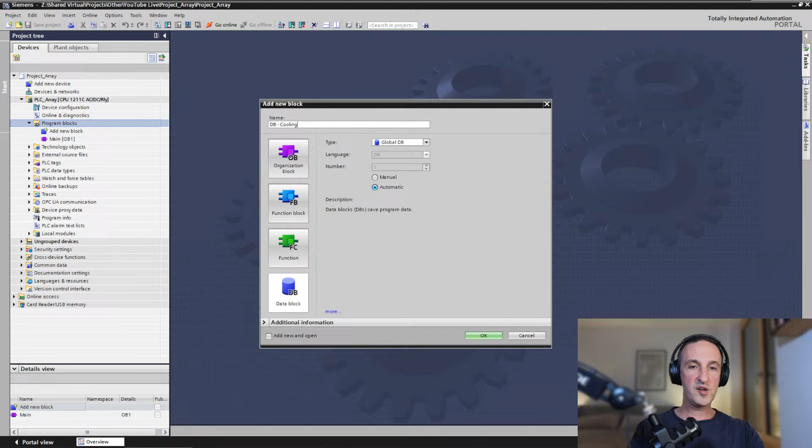The first place you can declare them is in a global data block. So for example, I add a data block, and because I'm going to use this later for examples with temperatures, let's call it DB cooling. Here under DB cooling, we can create a temperature log and declare it as an array. I will first show you how to type it in, so you can just press enter.

It auto-completes an array of reals, because temperature is a floating point most of the time, unless you want to keep it an integer and scale it afterwards. But let's keep this simple and say we have 100 values, from 0 to 99. So we have an array of 100 temperature values right here.

Another array could be, for example, status bits, cooling status. Let's say this is Boolean, so cooling status. Let's say you have 5 coolers, so you would have an array, and I can show you what can be done here as well. You don't need to start with 0, you can start with 1. An array 1 to 5 of Booleans. So this could be, for example, 5 cooling stations with a status for each cooling. Exactly.

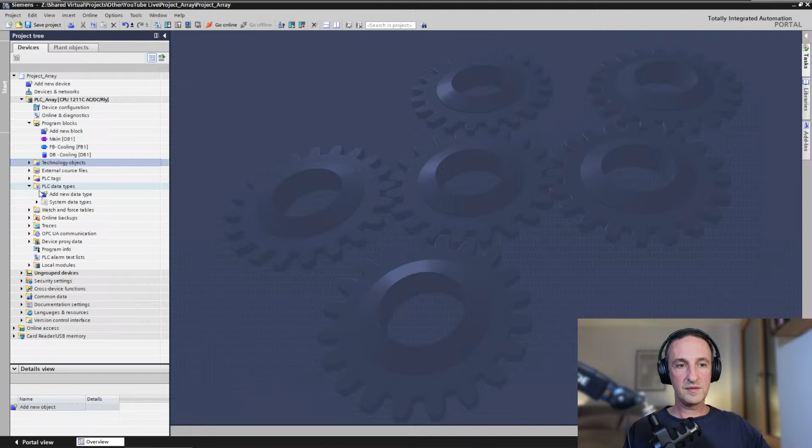But for all the other ones, for the temporary memory area, the static memory area, the in-out, the output, the input, you can create arrays as well. So that's actually instance data. So global data, instance data, and the last place where you can create arrays are in the data types. So in the PLC tags, for an input or an output, for example, you cannot create an array.

But for a data type, if you would create a new data type, for example, UDT cooling. UDT stands for user-defined data type. I think it comes from Simatic Manager. They used to call it UDT by default. And since I come from a Simatic Manager background, I kind of took over the naming from there.

So here you can as well create, for example, a temperature log. And you can assign array of real. All right. So those 3 places you can declare arrays in TIA Portal: global DBs, instance DBs, and PLC data types.

Yeah, this is a little bit more advanced, but I'm just going to show you, an array can have multiple dimensions. This is just a one-dimensional array, but you can as well, for example, create a 2-dimensional array. Let's say, for example, you have 5 coolers, again, like the last example, with 100 temperature values. So you like to log for each cooler.

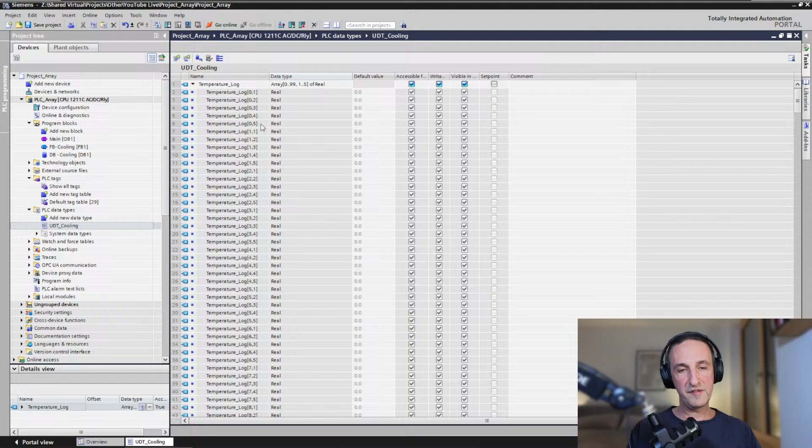Now you can see you have 2 dimensions, dimension 1 and dimension 2. So dimension 1 is the 0 to 99. Those are the temperature values, for example, and the 1 to 5 are the coolers you have. So now for each cooler, 1, 2, 3, 4, 5, you have 100 temperature values.

It probably makes more sense, I see that now, to do the coolers first. It would make for a better example, because the first dimension, you clearly can see that I don't use this a lot. So now it's more logical. So the first cooler will have 100 temperature values, the second cooler 100 values, etc.

But you know, this is more advanced arrays, and to be honest, I've never used this type of array in my career. I never had any use for it. The one-dimensional array, that's the one that I use the most. Let's see where we are here. Yeah. Okay, so those are the simple data type arrays.

Now I'll show you the more complex type of arrays that you can make. I'm not going to do it here. I'm going to do it in the DB. So these are just using single data types, the examples we've seen here. I'll just get rid of this one here. I'll now show you, for example, how you can make an array with a struct.

So let's call this one, for example, temperature log2. And we take, for example, an array 0 to 9. Let's say we have 10 values to keep it more simple, of struct.

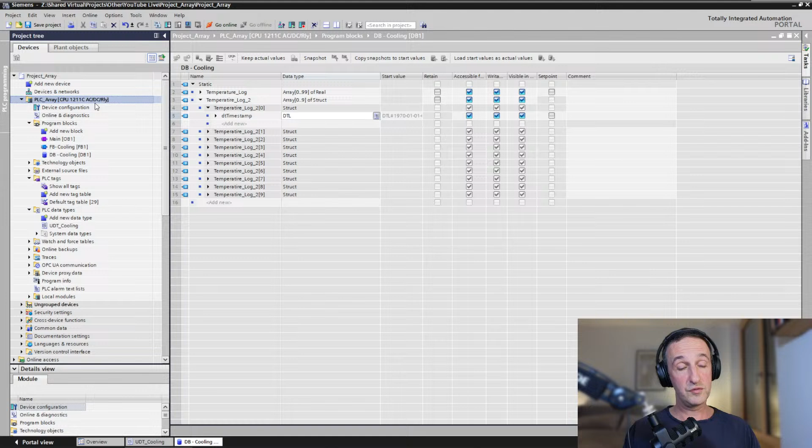Let's say we have a timestamp for our temperature log, which can be the long date and time format, which, by the way, you can use both in a 1200 and a 1500, S7. There are some other time formats which are only available for the 1500, S7-1500, but if you use a timestamp in your projects and you're working both with 1200 and 1500, depending on the size of the project, I would recommend you use the DTL, because as you can see, I have a 1200, it works here. And yeah, I've been using that quite a lot.

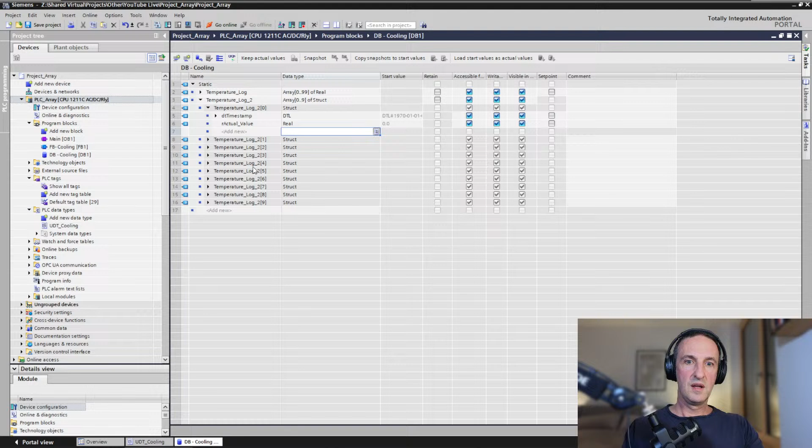So you have the year, the month, the day, etc., the hour. So that's one of the structures that we want to define. Then we have the actual value, the actual temperature. And I've miswritten here temperature. This will be a real. Then we, for example, can have the valve opening status. Let's say we have a control valve in a cooling unit, and we have a 0 to 100% valve opening percentage. Let's keep that real as well, and to make it more clear, 0 to 100%. This could be minus 40 to 60 degrees, for example, which is like a standard range for a cooling temperature.

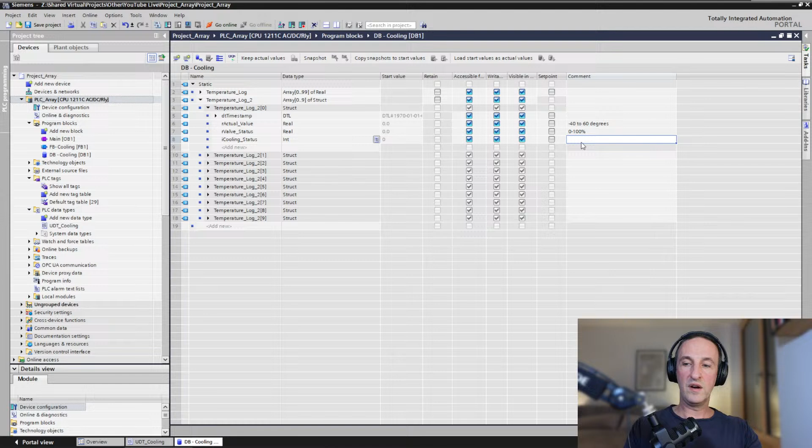And then, finally, we can have a cooling status as well, which might be the status if your cooling is running, is not running, or is faulted. So it can use an integer, for example, where 0 is off, 1 is running, and 2 is faulted. And this here is the date and time. So now we've created an array of a structure, and you can see every element of the array contains this structure. And this is one way of creating an array of a structure.

The other way, and that's the way that I normally do it, is by using a user-defined data type. So, for example, if we have a UDT called UDT temperature log, to keep the naming the same. And then what we can do is simply copy these ones here, Control C, and I'll paste them here. So now the only thing I've done is I've taken those values from the structure and I've added them to the user-defined data type.

So now instead of the struct, which is always created locally, and if you would use the struct somewhere else, you need to create that struct locally as well in the other function block. If you use a UDT, then you just need to add that UDT to whatever place in the software you're using it. So it's global, and there's only one place where you have to change it, which is in the UDT. So I would recommend that you always, as much as possible, work with UDTs, because it saves you lots of time. It makes your software more modular, easier to troubleshoot. It only has upsides, the way I see it.

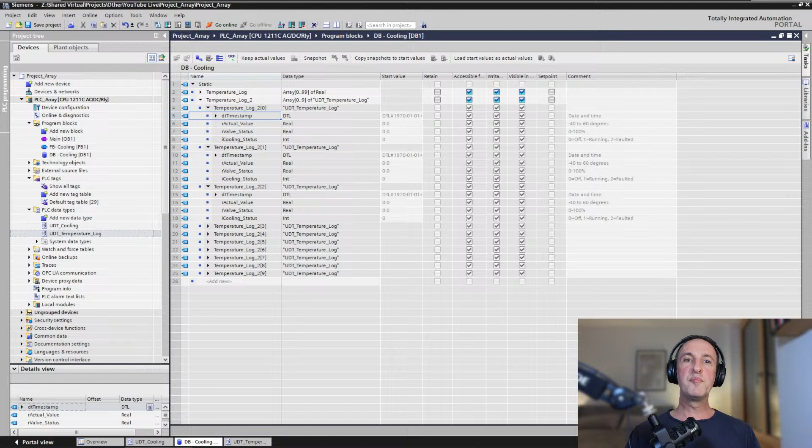So we just added this UDT temperature log, and you can see it's those same 4 values that I've added in the UDT that are visualized right here. Yeah, so those are basically some complex types of arrays. The big advantage I already told you: using a UDT is global, a structure is local. Okay, that's it for the simple and complex data types. If anyone has a question about this, please write it in the chat. If not, I'm going to continue to the next part, where I'm going to show you some key instructions that you can do with arrays, some of the instructions that I use a lot in my own programming.

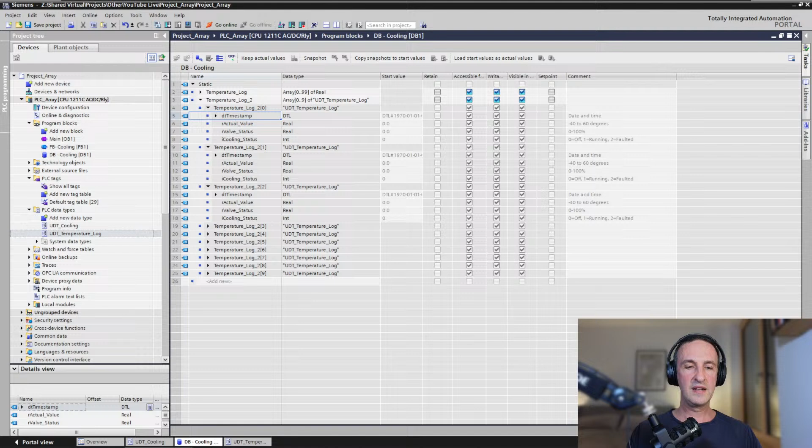And to go online, I have already prepared a bit. So I opened a simulation right here, which is just a 1200 PLC, which I dragged from here, and I started it. So that's quite simple in TIA Portal. That's already running. I've done that just to make sure that everything works. So the only thing I need to do now to go online with this simulation is simply press go online. Yeah, and of course I made a lot of new things here, so we need to download. Even though nothing is being called yet, I'll just make the download first.

So just a little trick for download, Control-L. I use a lot of keyboard shortcuts. So Control-L each time you download, instead of clicking and finding the download button. Just Control-L download, Control-S for saving. Make sure you press Control-S at least a couple times each hour to make sure that your software is saved, because sometimes TIA comes with an unexpected error crash, and you might lose a lot of work if you forget to save your stuff.

You're welcome, Martin. Yeah, these shortcuts, they are a lifesaver.

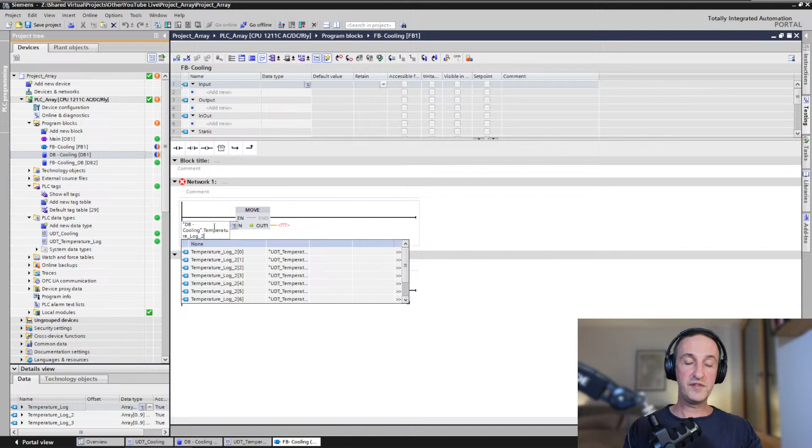And let's say we want to copy that. Let's remove this one here. Then we can add here the whole array. Either you just take one element of the array or the whole array, just like this. And you copy it to number 3. Download. Need to reinitialize the DB.

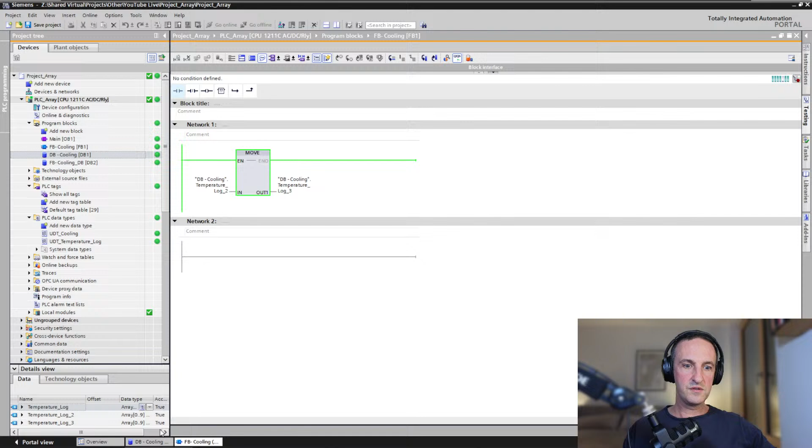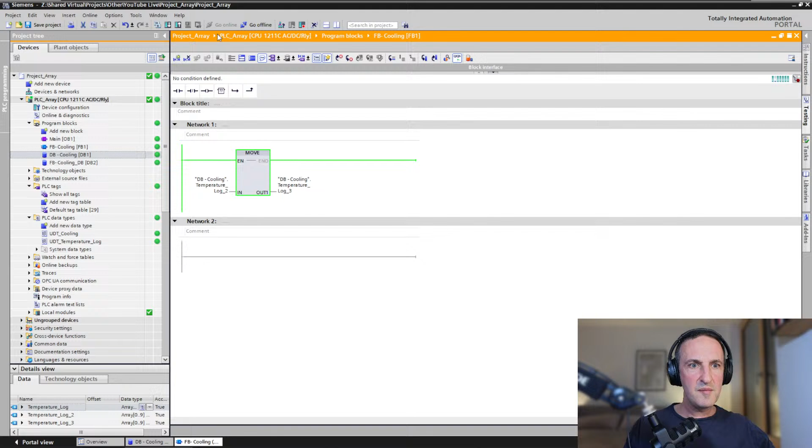There you go. And now let's try and put some values in this temperature log just to show you how it's working. Just gonna close these ones here, and then here's a little trick. So I have 2 blocks open at the moment, and I like to show them both. So there's a little button you can press on here, where you can split your screen into 2. I found it last time, but now it seems to be hiding somewhere. It's this button, split editor space vertically. F12 would have been there as well.

Yeah, that's interesting. That button was yesterday right here on my screen, but somehow I cannot find it at the moment. That's what happens when you're doing things live. All right, but now the good thing is we can do our examples here. We can do our instructions here, and on the right side, we can straight away. Okay, Marcin said, yep, thank you, Marcin. There you go.

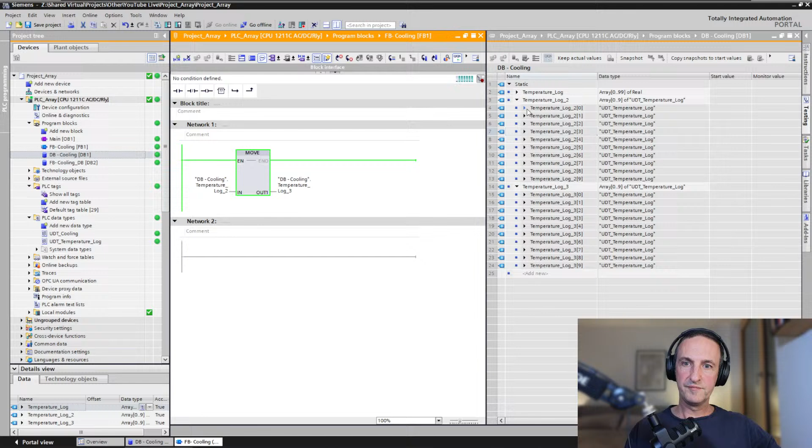Found it. So this is the one to split your work area into 2, either vertically or horizontally. I think here it makes more sense to do it vertically. Yeah, now of course it's moved it around. There we go again. Okay, so we're moving array 2 to array 3. And now let's try, for example, to add a value here. By the way, to add a value, you can just double click here.

So I'm online, so the glasses, as you know from Simatic Manager if you're used to working with that. You just double click here, and then you add, for example, an actual temperature here. And you see it's being copied over right here. And we'll take the last one as well, just to show you that it copies the whole thing. Let's take the valve status. Let's say it's open 45%. And you can see it's copied over. So this is copying one complete array to another.

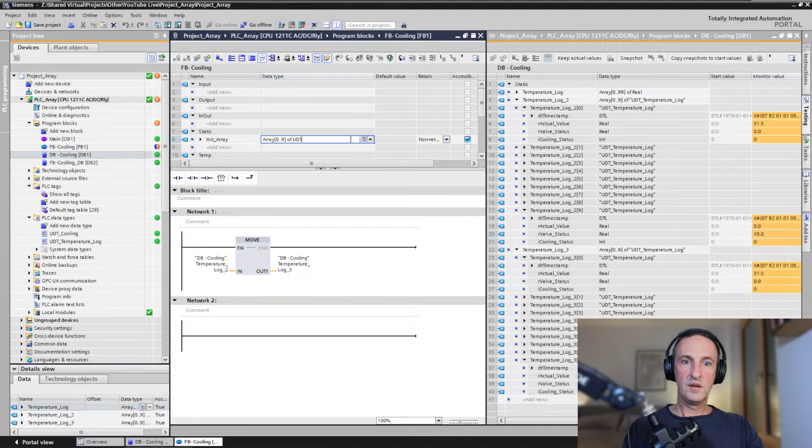And one particular instance where this is very useful is if you want to initialize an array. Let's say you have an initialization sequence that you do when you start your PLC up. Then you can, for example, declare the same type of array right here. For example, init, you can declare this init array. And because it's declared as a static, I'm just going to use the same size, which is 0 to 9 of UDT temperature log. There we go.

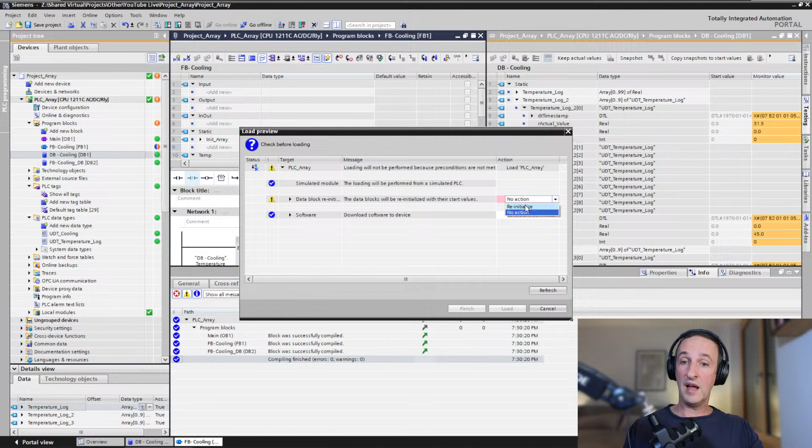And because you declare it as a static, everything is going to be 0 in here. So all the values in this array are going to be 0 unless you actually write over them in one of your networks, but you're not doing that. So this is a great way to initialize a complete array in just one simple instruction. So the only thing I need to do now is copy this one here. And before that, just have a look again at the log here, which we're using now, log 3. It has values in it, right? 31.5, 45.

So now I'll take this init array. I'll put it here on the IN of the move. We load, and now you can see, let's close this one, that our temperature log 3 is initialized. So the values that were in there before are set to 0. So this is a great way for initialization.

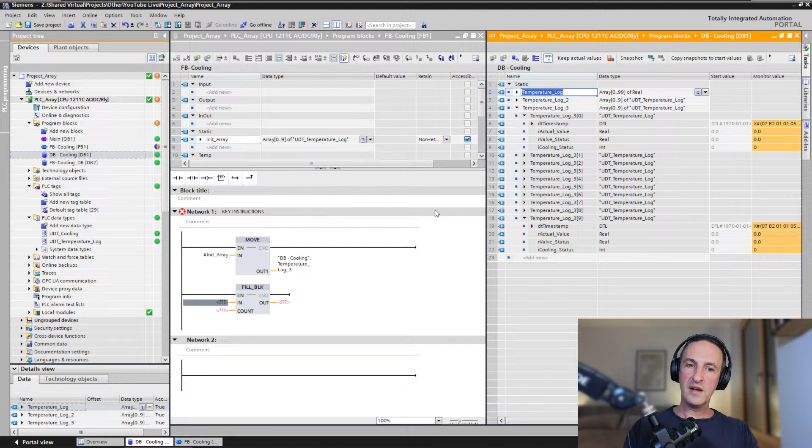So that is the move command. I'll just write here key instructions. Another very useful command is the fill block command. That's only for arrays of simple data types, so not for structures or UDTs, but you can use that, for example, for this array right here, the temperature log, the real array, and you can use that to fill values of the array with one specific input value.

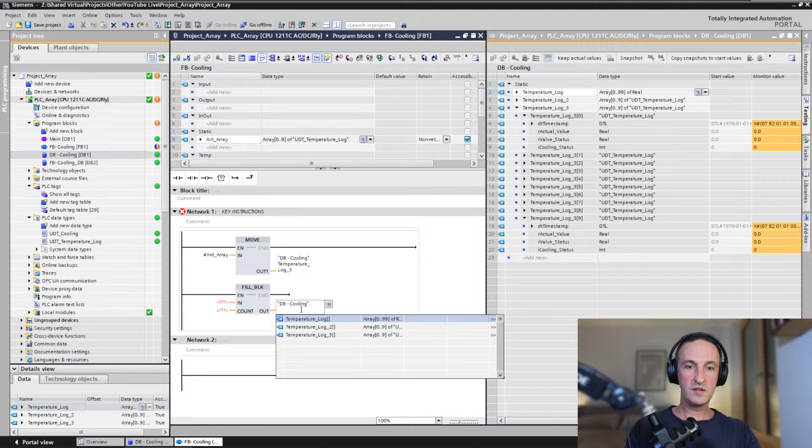So for example, temperature log 5. Of course, I need to put the DB cooling in front. Temperature log 5. And let's say I want to add 31 degrees. Not 13, 31. And I want to do that 4 times. So now it's going to put 31 degrees into log 5, 6, 7, and 8.

So we'll open this up so we can follow. And there you go here. So from 5 to 8, you can see we have 31. So this is great if you just want to fill some elements of your array with a specific value. But once again, this only works with simple data types.

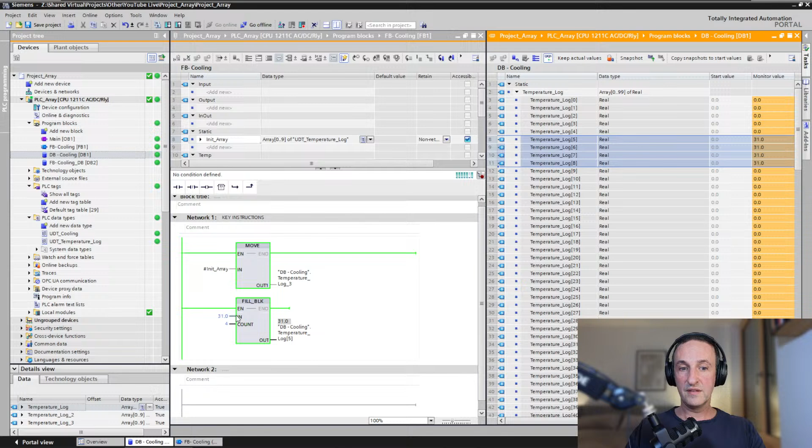So yeah, I sometimes use simple arrays as well. Most of the time I use UDTs though, but if you just do a simple array and you want to fill it, it's a great way to initialize a simple array like that as well. You can just add the value 0, and then the count is the whole number of elements, which in this case would be 100. So you can use it for initialization as well. That is the fill block.

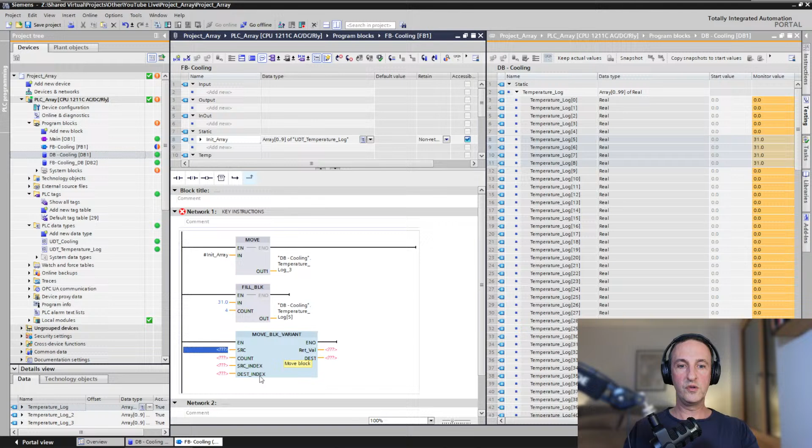Then I have an instruction here which I use a lot for the more complex arrays, which is the move block variant. What the move block variant does is it allows you to copy a source structure with a number. So you can, for example, copy 5 elements from one array to 5 elements of the other array with structures or UDT arrays, and you can choose where you start or where you end.

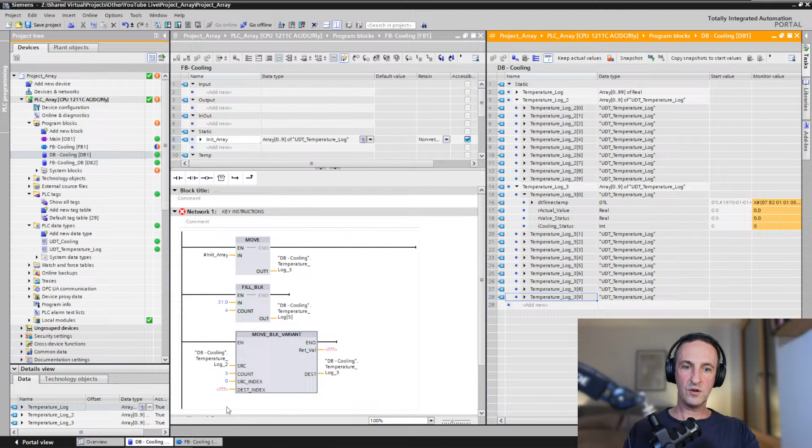So for example, let's say in this complex array we want to copy the first 3, 0, 1, and 2, to the second array, let's say the last 3, 7, 8, 9, to keep it simple. Again, need to put the DB in front. The source would be log2 array. The destination would be log3 array. And we said we're gonna copy 3 elements from this array, starting with 0, 1, and 2, and we're gonna copy them to 7, 8, and 9. So the starting index is 7.

And it needs a return value, so that's an integer. That's a code that tells you if the instruction executed correctly or not. If it doesn't execute correctly, it will give you a fault code. So this can be just a local temp. And now we download this, Control L again.

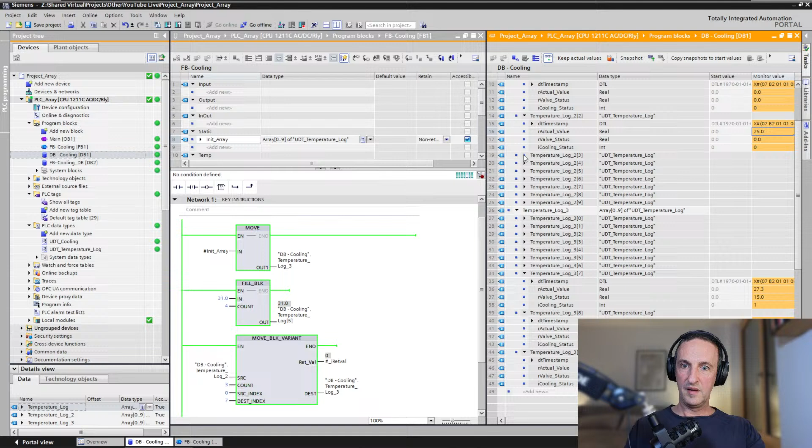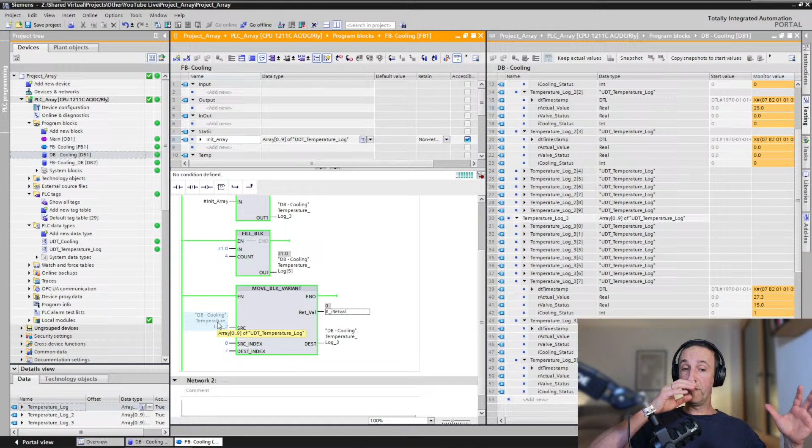So that's what you can do with a move block variant, and what I use it for a lot is shift registers. But I think I'm going to do a separate workshop or YouTube video about that. For shift registers, you can move all the elements one position, which is what a shift register does. So for each trigger, you would shift all your data one position forward. So for that, the move block variant is a very good instruction.

There's one little caveat here, one thing you need to remember, and that is the source index and the destination index are zero based. And what that means is, we start our arrays here with number 0. But as I showed you in the beginning, you can also start, for example, at number 1.

And zero base means it would be the first element of your array. So if this would be array 1 to 9, then source index, this 0 would mean array 1. So it's a little bit confusing. If this would be 5, now 0 would mean array element number 5, 1 would mean array element number 6.

So for that reason, I would recommend, if you work with structures or UDTs in your arrays, always start with 0 as your first element, because most likely you will be using this move block variant command to do some manipulation of your arrays, and you just don't want the extra headache with thinking, how does this source index relate to the starting point of my array? So just start with 0, and then this number correlates directly to the element number in your array. So that's quite easy.

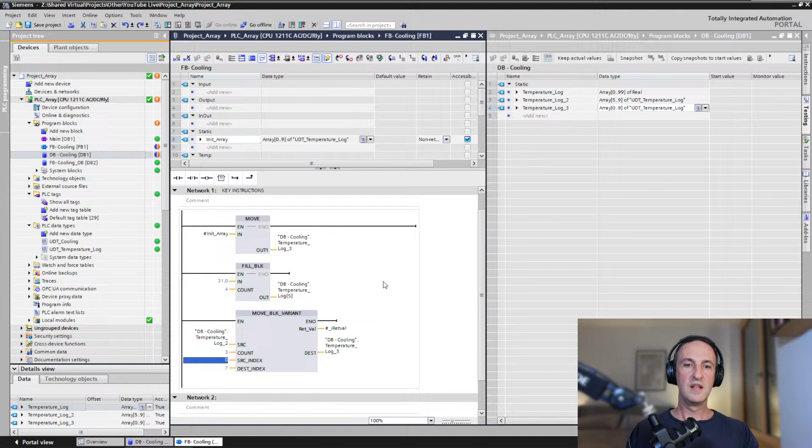Let's put this back at 0. All right, all good so far. No questions I can see, so hopefully that means it's clear.

I'm just gonna have a sip of my berry juice, because my voice somehow seems to disappear with these longer talks.

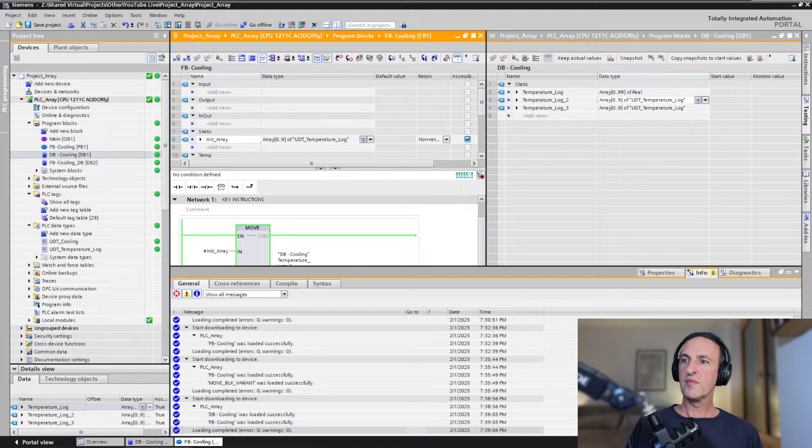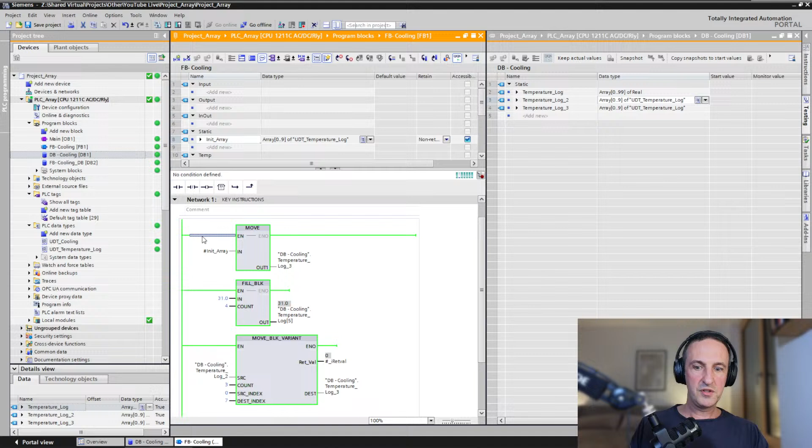And finally, I have 2 more commands for you, 2 more instructions, and I use these ones a lot as well. I'm just gonna disable these to make sure they don't interfere with anything afterwards. And that is lower bound and upper bound commands. I'll just put them first here, lower bound, upper bound. They will give you the first element of your array and the last element of your array.

So that's very useful if you work with dynamic array sizes. For example, different shift registers, different temperature loggings, like say you have one logging of 100 values, then for another unit of your machine you're logging 200 values, and you want to build one function that can handle different sizes of the same array type, the same structure, the same UDT. Then you add the array as an input-output on your block. So I'll just show it here, an array temperature log.

It's a dynamic array, so you don't really know the size. You don't know if it's 0 to 9, 0 to 100. What you do then is you put an asterisk like this, and this makes the array dynamic. So now where your function is being called, you can add an array of any size here. The only thing, it needs to be the correct data type, UDT temperature log. But apart from that, it can be an array 1 to 10, 20 to 50.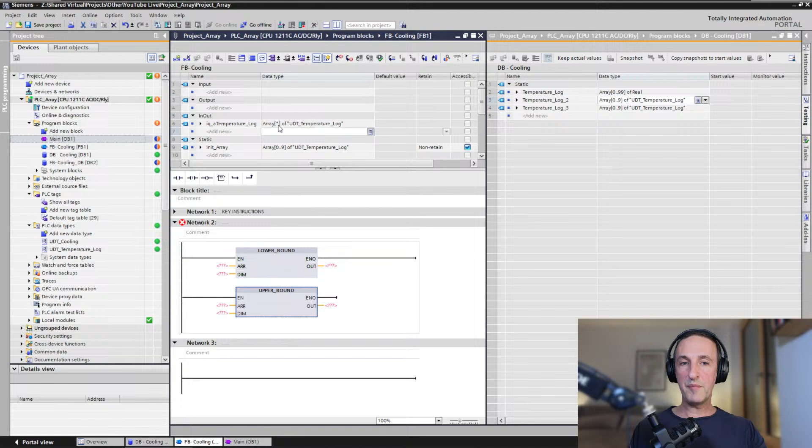So to get back here, we have the lower bound, the upper bound. They only work with these dynamic arrays with the asterisk. If you put a fixed array size on it, it will give you an error saying that the actual parameter does not match the data type array asterisk, or dynamic. So you need to put this type of array on there.

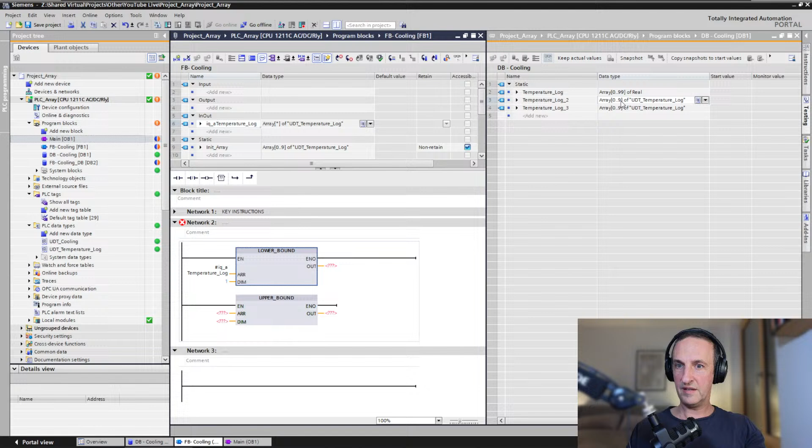And then the dimension, like I told in the beginning, we're using a one-dimensional array. You can do two-dimensional like this, but we're just using one dimension, so that's what the one stands for. And then the output would be the result: what is the first element, the low limit of your array? So let's just call this, for example, I.

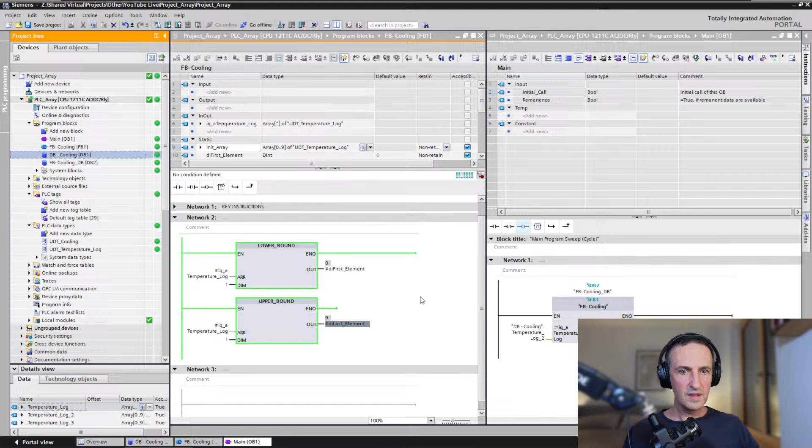And now you can see, I'll put the DB here so we can follow along. That for temperature log 2, our first element is 0, which is this one right here. And our last element is the 9.

And then one thing that I typically do as well, you can calculate the size of your array, which is quite good if you, for example, want to fill it with a value, then you start with 0 and you fill it for the complete size. And for that, you can use the calculate block, which is a very useful block in TIA.

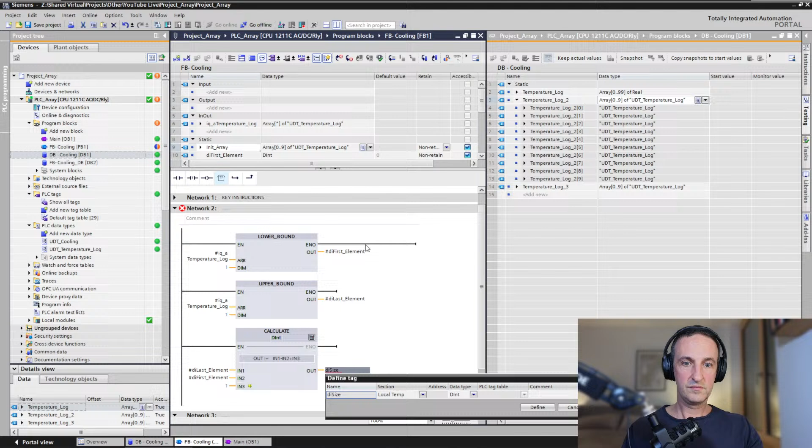And the size is simply the last element minus the first element plus 1. So that's input 1 minus input 2 plus 1. And then you will have the size. There you go. And we download again. And now you can see size is 10. We have from 0 to 9, 10 elements in our array.

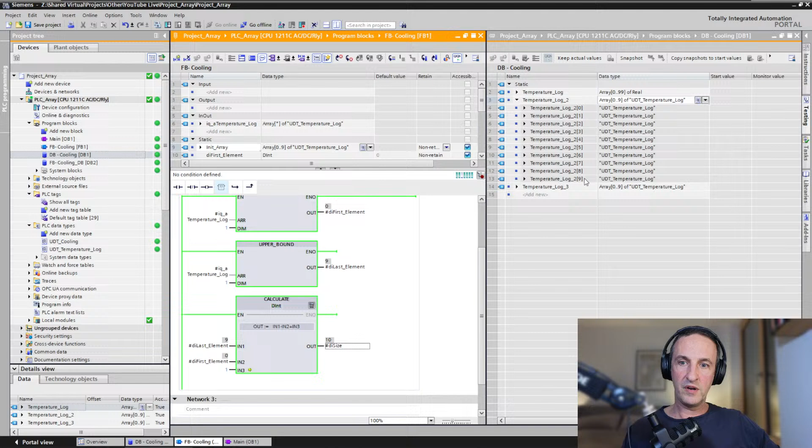So that's actually very good logic to put in one function block, like a basic instruction you do on complex arrays, like calculate your first element, your last element, and your size, and then you can put those as an output, and then you can use that for any size of array of that specific data type.

Again, that's how you work more modular, create small blocks that do these type of calculations, so you don't need to write them all the time. You just write them one time, and then you reuse it in every location of your program where you need to use it. Okay, that was the lower bound and the upper bound.

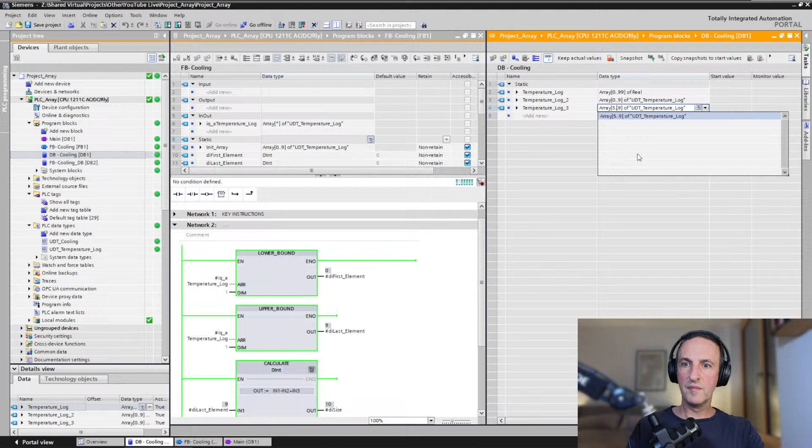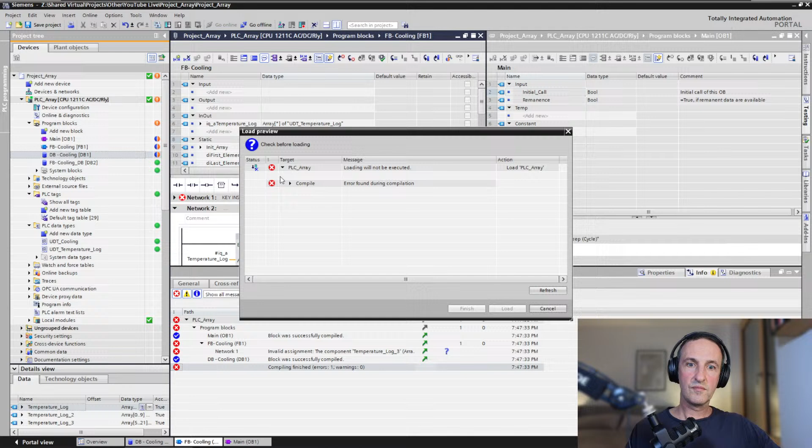And just for fun, let's just do 5 to 21 for temperature log 3, so you can see the difference when I put this one. So it's a different size of array. I'll put this as the input for the block. I will load. Invalid assignment. Yeah, okay. Because we changed the size and the init array is not that size anymore. We remove this instruction because we're not going to use it anymore.

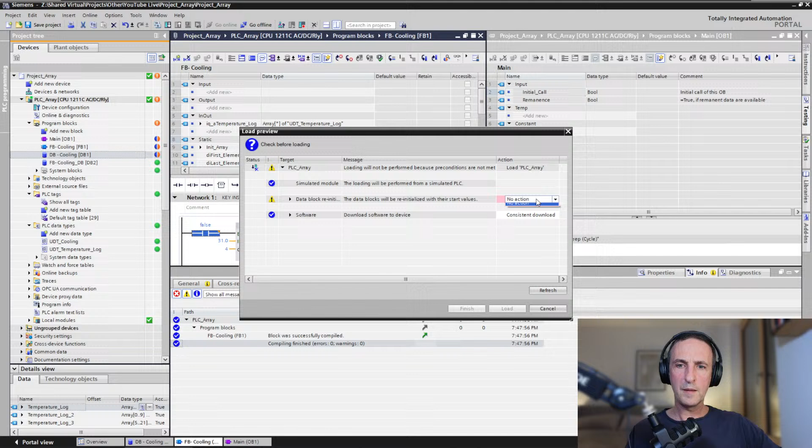And now you can see that we have our first element 5, our last element 21, and the size is 17. So from 5 to 21 are 17 elements.

Okay, I see Marcin has a question. How do you practically use size information? That is what's coming up in my next examples, Marcin. So I will show you how to use this size in a couple minutes. So if you still have some questions, then please ask. But yeah, I'm gonna do that after the next thing. Yeah, you're right, it's gonna be a for loop, Marcin. I'm first gonna show how to access array elements dynamically, which means using an index variable, and after that I'm going to show you some examples of loops to get process information, data information from your arrays.

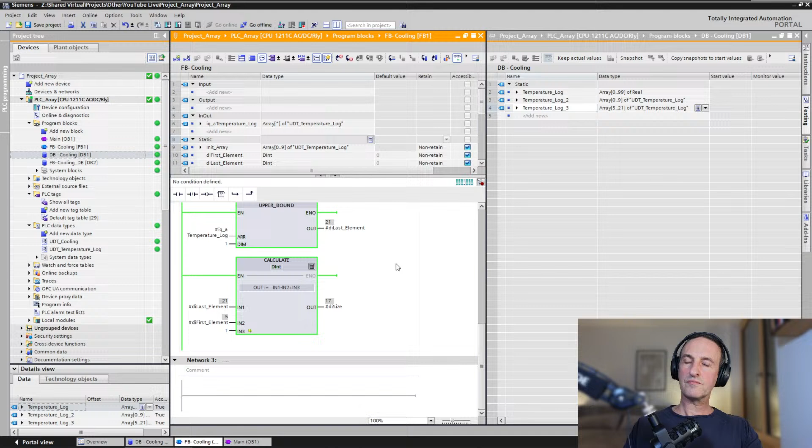So to access an array dynamically, dynamically means we create a tag, and the tag can be a value from the HMI, or it can be a value through your software, through your logic. And with that value, you define which element of the array you want to look at.

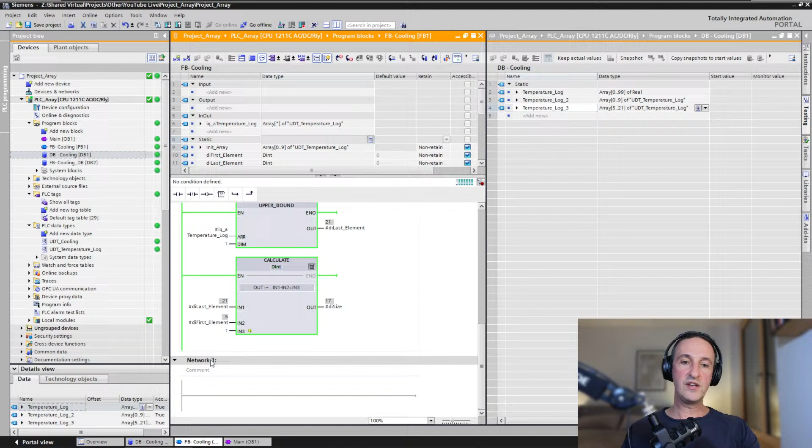And to do that, we first need to make an index variable. So I typically just call this index a double integer. As far as I know, it just has to be a whole number. It can be an unsigned integer. It can be an unsigned double integer. It can be an integer, a double integer. And what we do then, I'll just name this index variable. And this one was lower upper bound.

And what I'll do now is I'll move a value into the index. For example, index, we move the value 1. And then I'm going to get the value from the array using the index. So for example, DB cooling, and then instead of the fixed number, the element, I put in the index variable. And let's, for example, get the actual value, and we transfer it just to a temporary variable, just as a test. Actual value, local temp. All right.

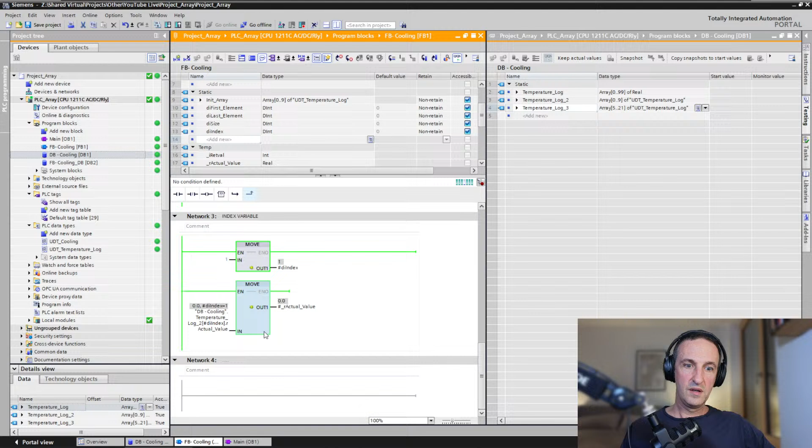And at the moment it says it uses index 1. So index 1, that's element 1. At the moment that's 0, but if we put something in there, 15 for example, you can see right now that we're indexing. So this is indirect. We're not directly looking at the 1, but we say we want to use 1 here as our element, and

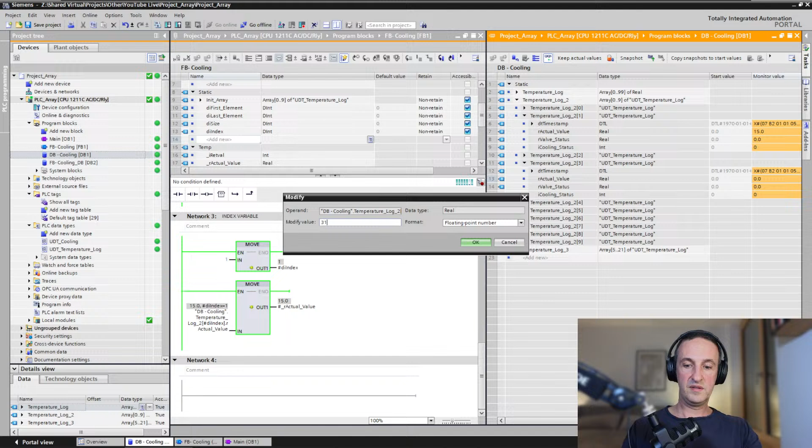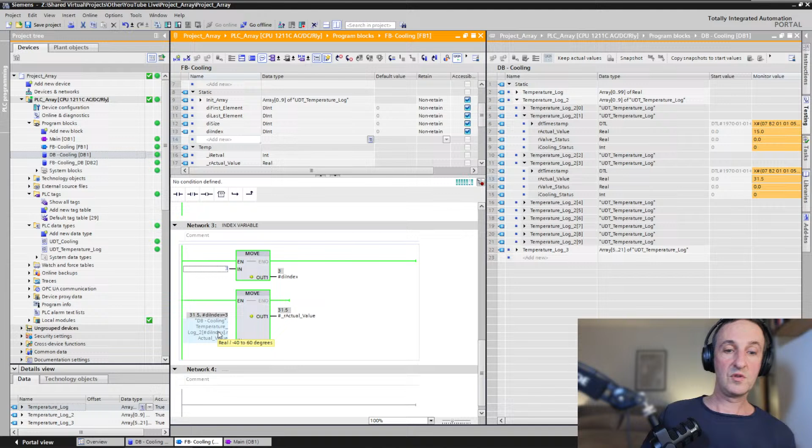we have 15. If we, for example, put temperature 31.5 in element 3, and we want to have a look at the actual value in position 3 of our array, then you see now it's looking right here. So this is called indirect addressing, or dynamic access to an array element.

This can be useful. For example, let's say you have an HMI and you want to scroll through your temperatures in your log, then you can make an integer or a double integer on your HMI. And then, for example, with the plus button go up in the integer, with the minus go down, and then you can go through the different array positions and dynamically get a different logging temperature. That's one example to use it.

Exactly, yeah. So that's an index variable, and that's quite important for our next step. And this will be the last step that I'm going to show you, and that is how you can get specific data from an array by looping or iterating through the array, going from the first element to the last element, going through all the elements and finding some values or calculating some averages.

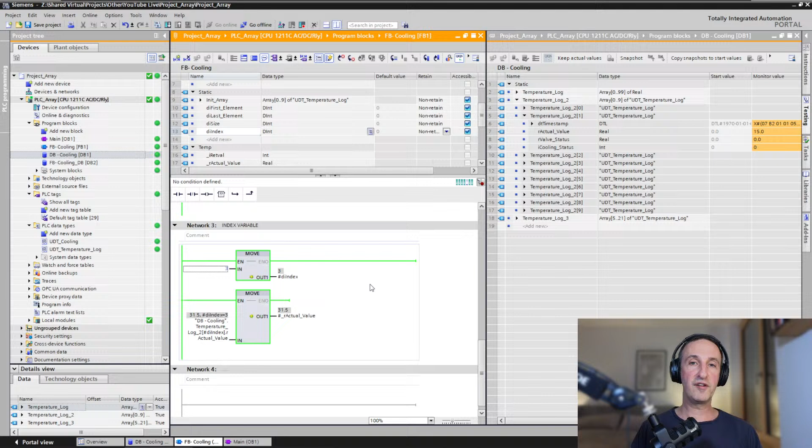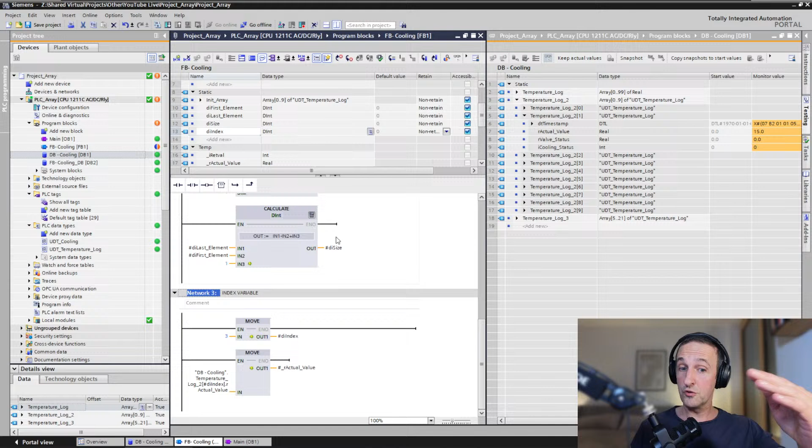And to do that, I told you in the beginning I was going to use some SCL. Personally, I don't use it a lot, but I think in this case it's very useful because it keeps the code very short. I've done this in ladder logic as well, but just for fun, I thought let's do it in SCL to show you how you can do some more compact programming. And this is a great thing in TIA Portal as well.

You see I have a ladder logic block, but I can very easily just add an SCL network right here, insert SCL network. And now I just got an SCL network in between my ladder logic. So if you have some logic that is easier to do in a text-based environment, but your standard is ladder logic, you can just do it like that.

So what we're going to do right now, we're going to use this temperature log 2. We're going to loop through all the 10 elements. We're going to put in some different values here. And then we're going to find the highest temperature value, the lowest, and we're going to create an average of all the temperature values. So to do that, we're going to need to create a for loop, and that is done with an index tag, which we already have. And we start by typing for.

That is the starting number, and this is quite interesting because we just did the lower bound and upper bound. We have the first element and the last element. So we start at the first element and we're going all the way to the last element. You can also write the step. I think if you don't write it, it will be default 1, but I'll just write by 1, which means we're going to go one step at a time. So we start at element 0, then 1, then 2. You could do by 2, then you do 2 steps at a time.

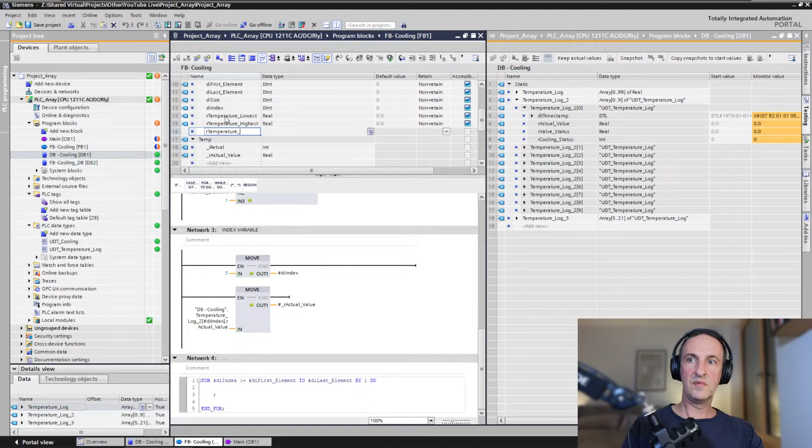So let's make one temperature lowest, temperature highest, and I'll make the average one as well because we're gonna have that in a sec. And temperature average. There we go.

And the way we do that is, let me just see if I have it here. Yeah. So if our value in that array element, I'll first write it and then I'll explain it. That's going to be easier.

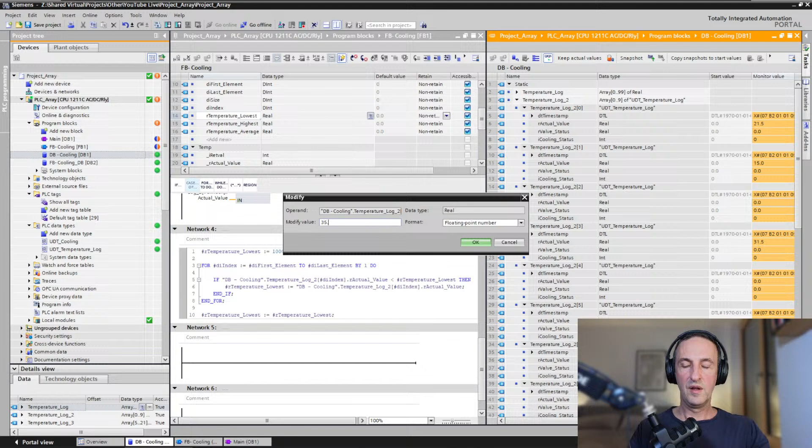Two more. 19.7. 22.8. So now we put 10 values in here in our array. And let's download this and see what we get. We have 0 at the moment, so either we still have a mistake. As you can see, it's hanging at the moment, so I need to wait.

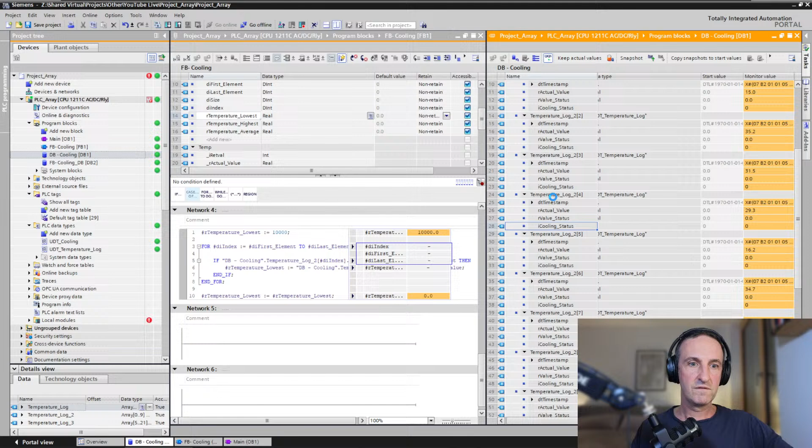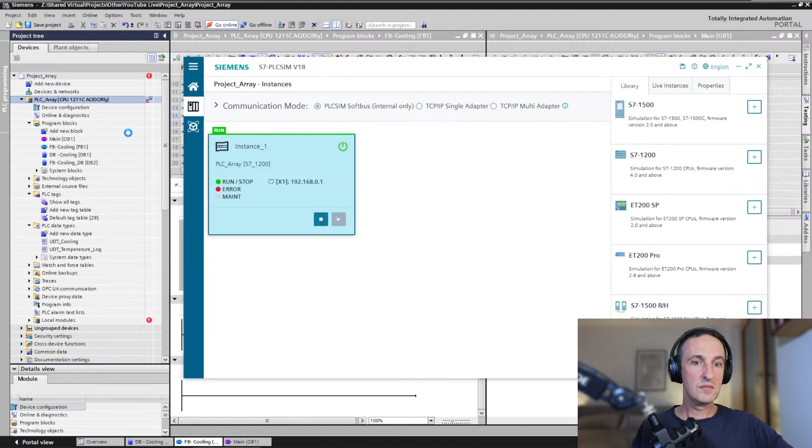Oh, yeah, that happens. So we were thrown offline. I know what happened. That's good, because that's good for troubleshooting. Just need to wait a little bit until TIA Portal gives me permission again. I think I did an overflow of the array because I forgot. See, the low and the high that I calculated was of the other array, of the temperature log 3.

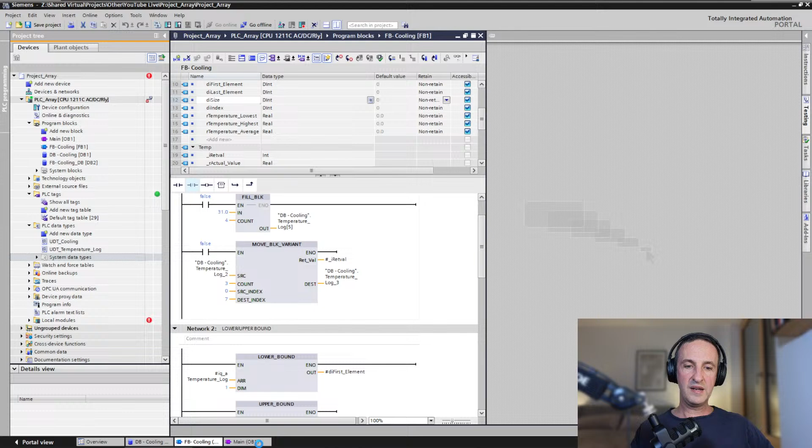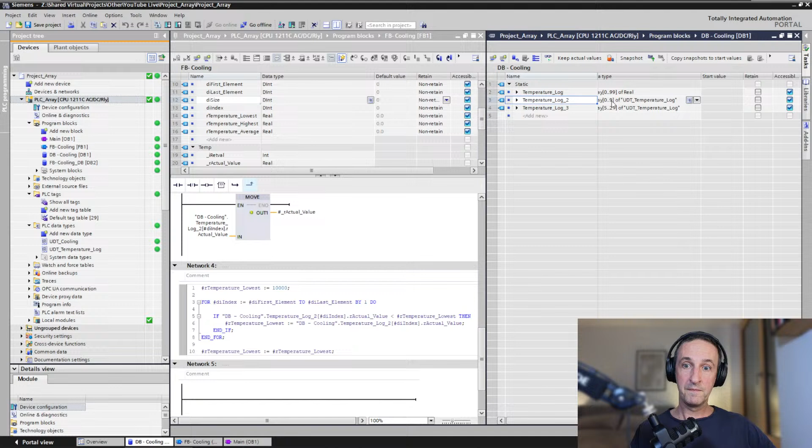At the moment it's really moving slowly. I think I need to stop this one here first. See, the problem is the first and the last element I'm calculating from temperature log 3. And we changed temperature log 3 to a different array size, which means right now we're trying to loop from element 5 to element 21, but on temperature log 2. The 5 works, but as soon as it goes over 9, it's not working.

And our PLC goes to stop because we don't have a program error OB downloaded. So that's another tip. If you want to make sure that you don't get these things during production, make sure you add an error handling OB. I think it's 121, but I'm not 100% sure. It's this one right here. Programming error, it normally says.

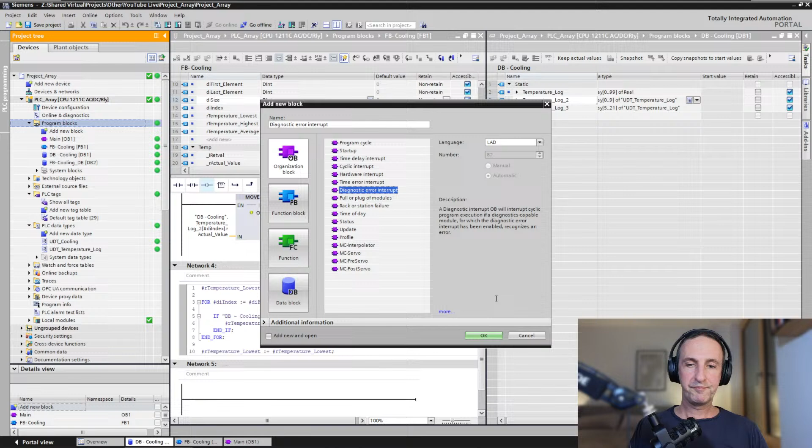Pull or plug, diagnostic, time error, hardware interrupt. Yeah, I would have to look it up. Normally there is an error OB for that as well. But at the moment we are just going to make it right by adding the right temperature log here, making the download, and putting the PLC back in run, because as you can see right here, we're still in stop.

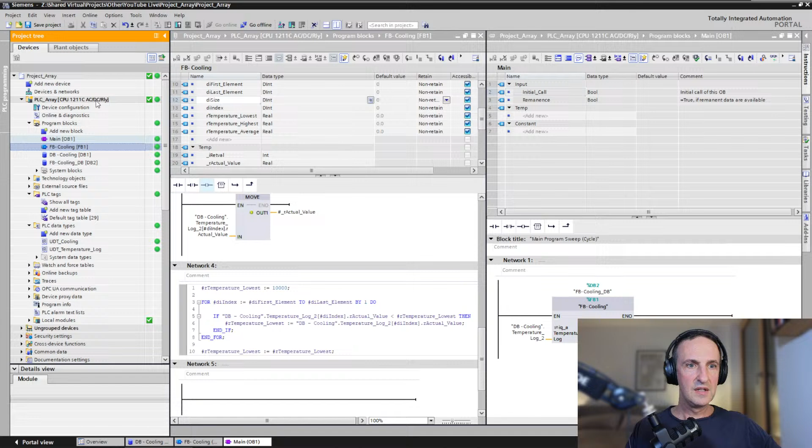Another way to check the status of your PLC. I'm gonna let that go for now. Let's just go back to run. There we go. And as you see right now, we're having the correct values here, 0 to 9.

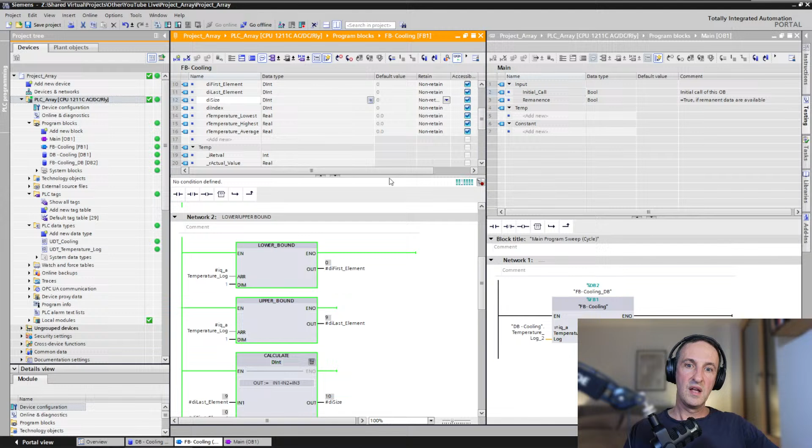Nick asks, why does it not catch this error in the compile step before downloading? That's because we're doing dynamic access to arrays. So it only realizes that you're out of your array once you go to run, because here we're using tags for first and last. It doesn't know until you're in run what your first and last element are, because it's all dynamic. So that's why the error.

Okay, that could be, Sebastian. That's the reason why I didn't find it. I normally work with 1500s, and there I always use the programming error OB, can't remember exactly what it's called, but I think it's 121. So that's the reason, Nick. It's dynamic.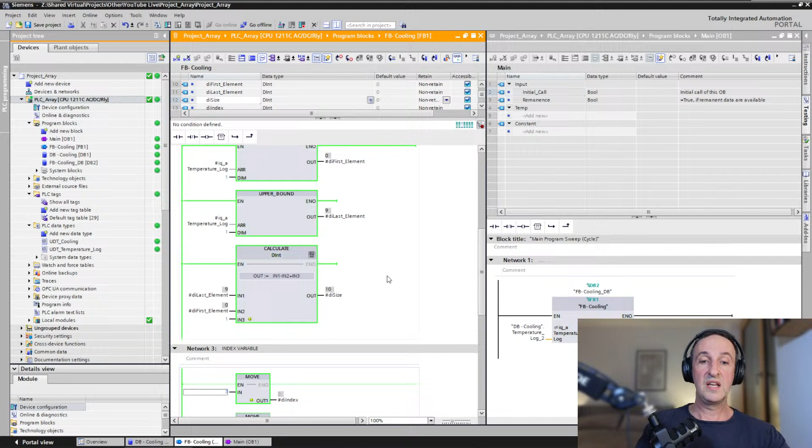If it were not dynamic, you could not type in 25 in temperature log 2. It just wouldn't accept it. Okay, but back to our example. We're still in run, but of course it put all our values back to 0, because we downloaded everything again. So we quickly put values back in here.

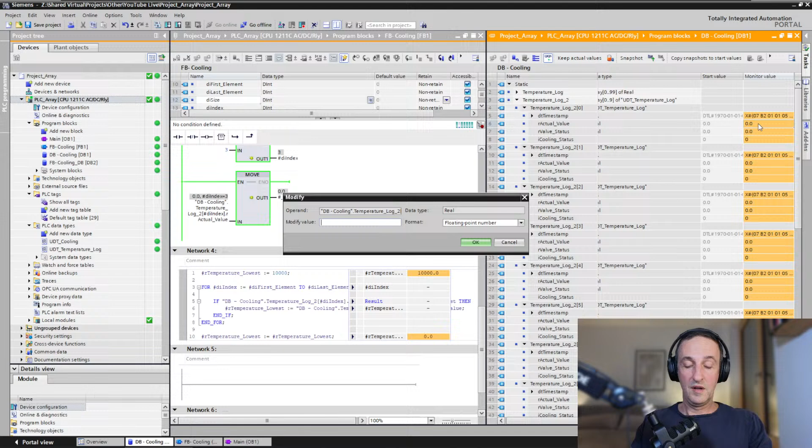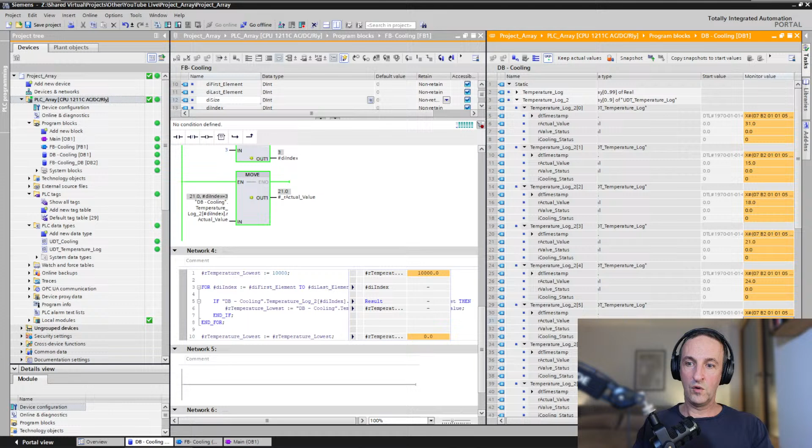So 15 was our lowest one. I'll just take whole numbers now just to make it quicker. 15, 18, 21, 24, 36. Let's give a high one here, 42, 22, 19, and 29. There we go.

Now it worked. So you see, we iterated, we go through all the values, and we found the lowest temperature, 15. If we put this one up, for example, to 31, then it finds 18, which is the next lowest one right here.

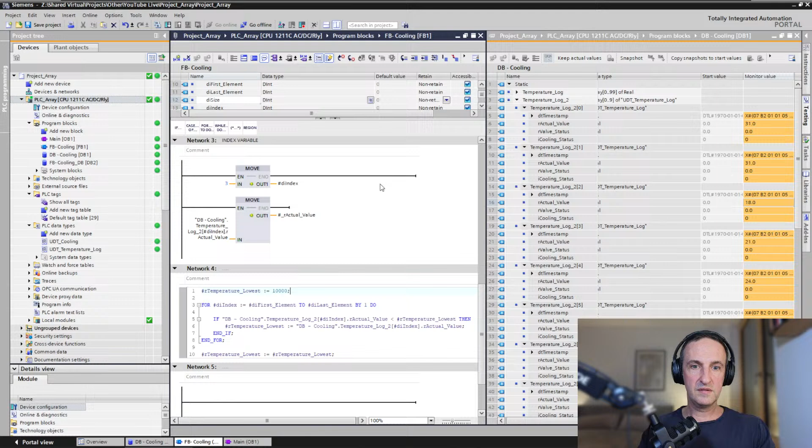Now we can do the same for the highest value. So I'll just stop the monitoring. And I'll do the same here. I just give an unrealistically low value for the high one first. Should actually be floating point. And then I can use the same for loop. I just need to use a different if instruction.

And now, instead of if it's smaller, we say if it's bigger than the highest, and everything will be bigger than minus 10,000. That's why this will work. Then the new highest value will be that actual value from the iteration. And here again to check the output.

Maybe it's because I'm not used so much to working with SCL that I program these last lines here. Maybe you can see it. No, you cannot see it in the loop itself. No, that's true. But maybe there's a better way of doing this. Okay, everything is up to date. And now we go online right here.

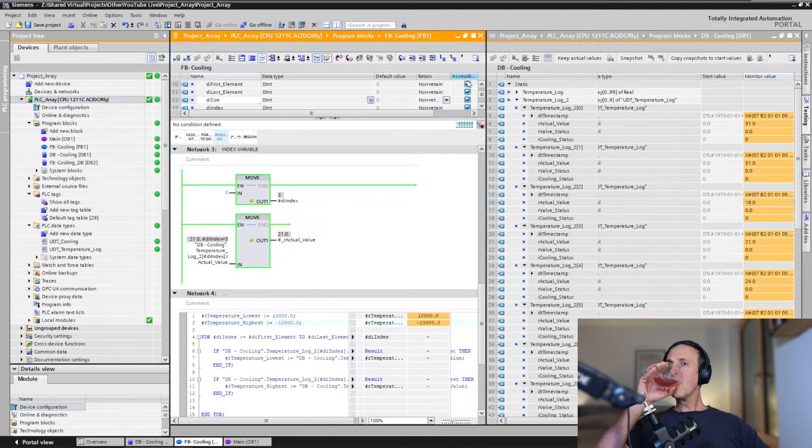And you can see that the highest value in our array of 10 temperature loggings is 42, which is a value we can find right here. So if we change this, for example, to something low, let's see what it finds then, 36, which is this one right here. So that's finding the highest and the lowest value of something in an array. The last thing I'll show you is how to find the average.

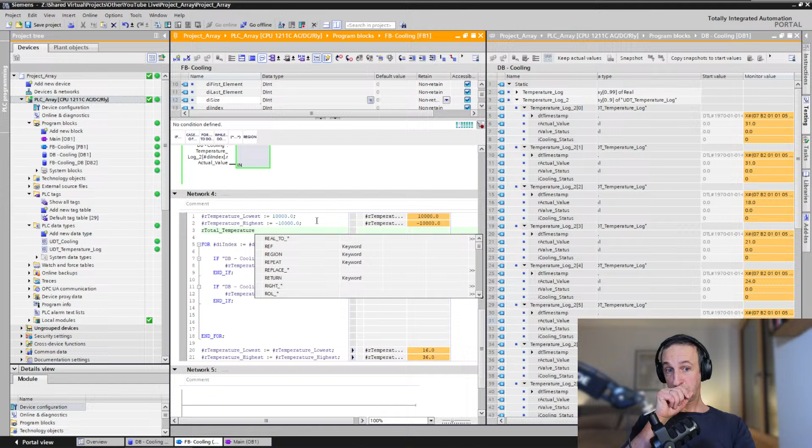And for that we don't need to initialize that. So what we're going to do is we're going to create a total. We do need to initialize one value, that is total temperature. We're going to count up all the temperature values, and then we're going to divide it with the size of our array. And that, Marcin, what you asked before, that's why we calculated the array size. So now we can use that value for an average calculation.

Total temperature, so we start with 0, for example, and we still need to define the tag. A real. And we're going to iterate through all the elements, and we're going to say that the total temperature, which starts at 0, is the previous result from the iteration plus the new result, temperature log 2, and we use our index variable right here like this. I need to put actual value still in there. Yeah, this became quite long.

And that gives us a total temperature, and the last thing we need to do then is, after the iteration, we need to divide that total temperature with the size of the array to get the average temperature. So the temperature average is the total temperature, the sum of all the temperatures in the array, divided by, I think it was a double integer, the size. Exactly.

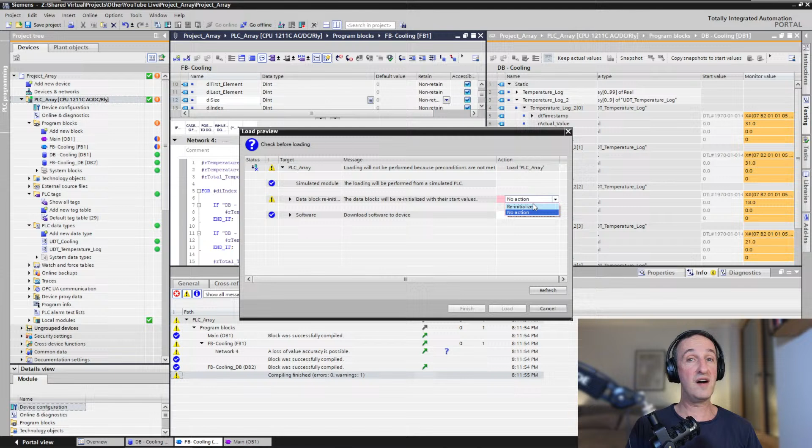I work a lot with molding lines, so it's cooling down a product. I think I've done this at a customer. I would take a log every minute, but maybe it's enough to make it every hour. It's just extra data that your customer can use for detecting faults in the system. For example, if it sees your cooling is going up and down, it might have to look at the PID, or there might be a fault in your cooling circuit somehow, a valve that's stuck. All these things can make sense.

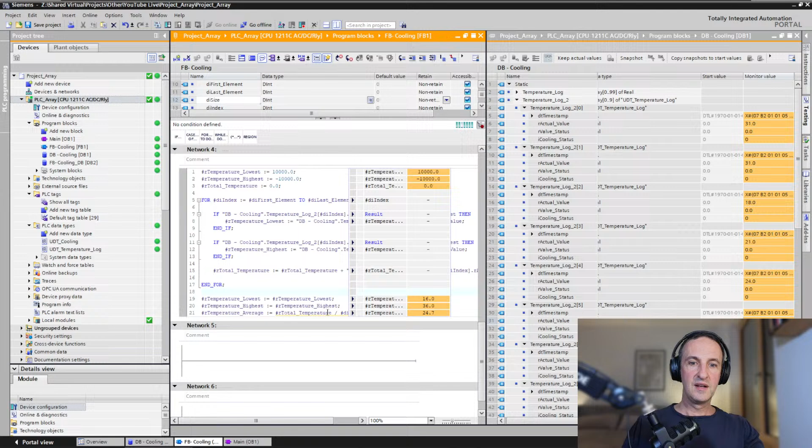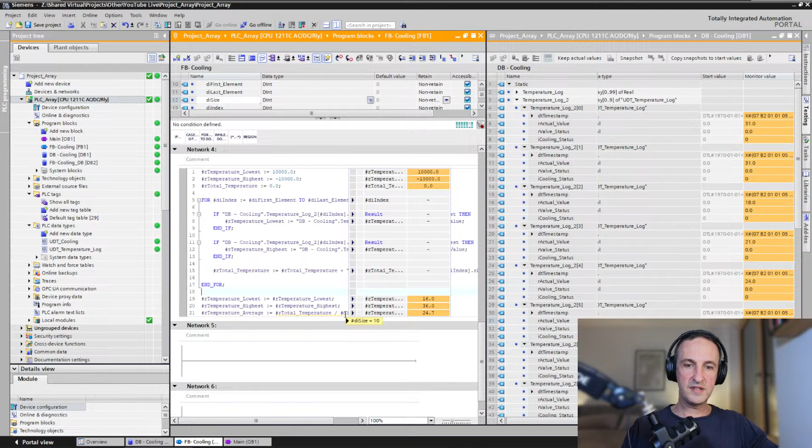All right. So that was the last part, the average temperature. So we got a total temperature, which is 247, divided by the total size, which is 10. So you can hover over the variables to see 247 is the total sum of these 10 temperatures, divided by 10, which is the size of our arrays, 10 elements, which gives us an average temperature of 24.7.

Nick says, thank you so much, Hans. Super useful. Yeah, thanks. Very cool, Nick. I guess you're checking out. See you next time.

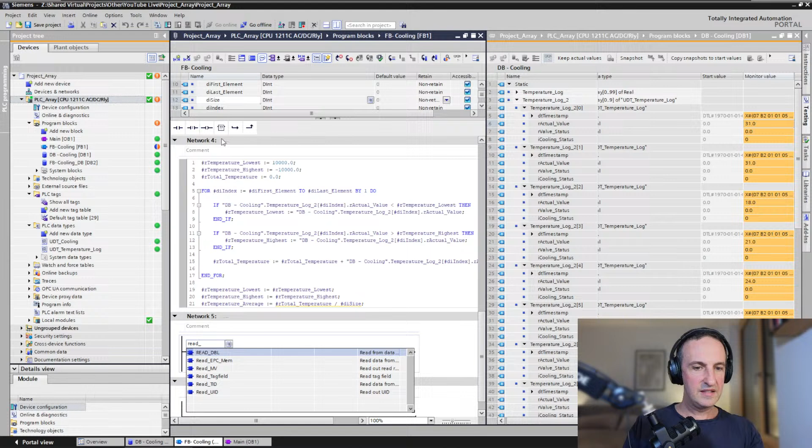Marcin, how do you define timestamps to save the log? I mean, to get the timestamp, you first read out the time from the system. There's a specific instruction for that in TIA Portal, I think it's read system time or something like that. I can't remember it by heart. It's some kind of a read instruction, I would have to look it up. Read clock or something like that. Then you read the actual system time of the PLC, and that's in DTL format, and then you transfer that to your temperature log.

Martin, on the topic of data logging, have you worked with external DAQ systems such as iba? Do you usually do it directly in the PLC? Martin, no, I've not worked with DAQ systems. I have worked with SQL databases. The DAQ system is not familiar to me, but I have worked with SQL databases where we send data there, but it was not meant for logging.

I would say if the logging is not too big, if it's not big data, so to speak, you can do it in the PLC. It's easy. If it gets too big, then I would look for other options like sending it away from the PLC to a third party system.

Moises, you write something about a pre-built function that can be applied to arrays. Can you ask your question in a different way? I'm not really sure what you mean by that. Marcin, what do you mean how to split it? Yeah, you can split the date. The date and time format is already split. If you look at the timestamp right here, you already have year, month, day, weekday, hour, minute, second, nanosecond. So you don't need to do it manually. I know in older logic or Simatic Manager, you needed to take each byte separately and say which byte is the year, which byte the month, but here it's already structured.